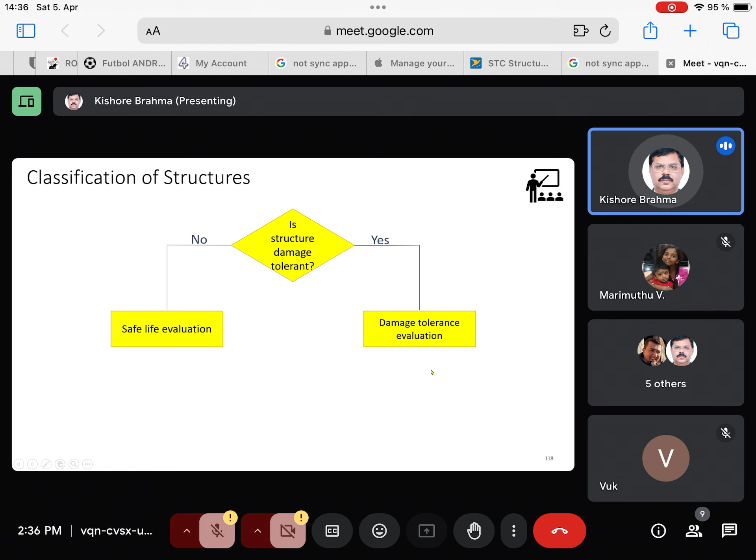So we'll recap quickly whatever I covered last Sunday. We'll see the classification first. It is basically done to identify, because there are so many components in aircraft structure, which structure has to be evaluated from fatigue and damage tolerance point of view. So here we have two categories: either it can be safe life evaluation or damage tolerance evaluation. On that basis, four main categories have been defined.

So this is a new slide I've added just to give examples of the most important components. And this is the flow chart describing how to identify category A, B, C, or D. Category A is defined as principal structural element. Both A and B are known as significant structural elements or items. So irrespective of classification, from the certification point of view, both category A and B have to be evaluated from fatigue and damage tolerance point of view.

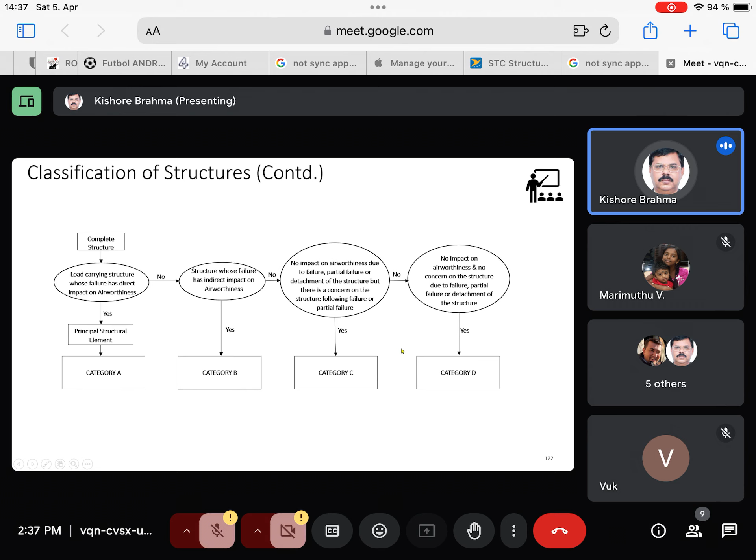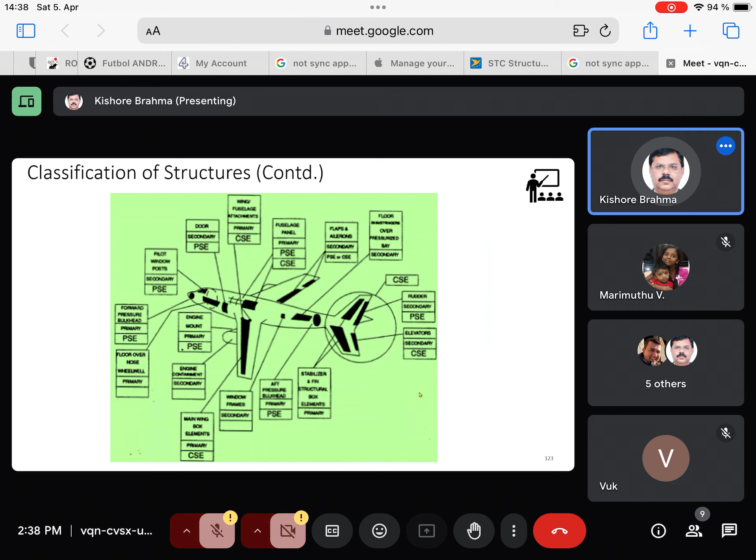This is the same thing reflected in a different format to make it simpler to remember. It's not too complicated, not so many flowcharts, but it follows the same thing as previously described. And this is a typical structure, released by FAA way back in the 90s in the public domain, where instead of category B, C, they have mentioned PSE and CSE. That's just for overview of the main components. They have not gone into detail of parts of each component.

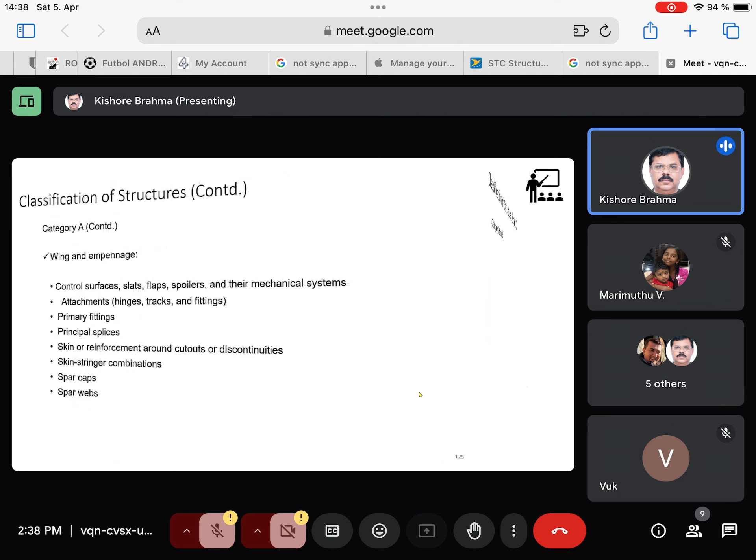So all these definitions, I've already shared the notes with you people, so I'll not go in detail now. This is also available and categorized by FAA. It is available in FAR also.

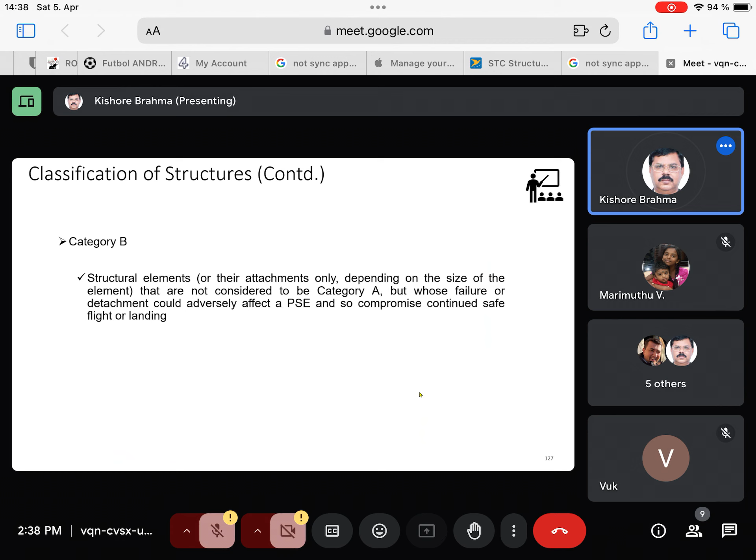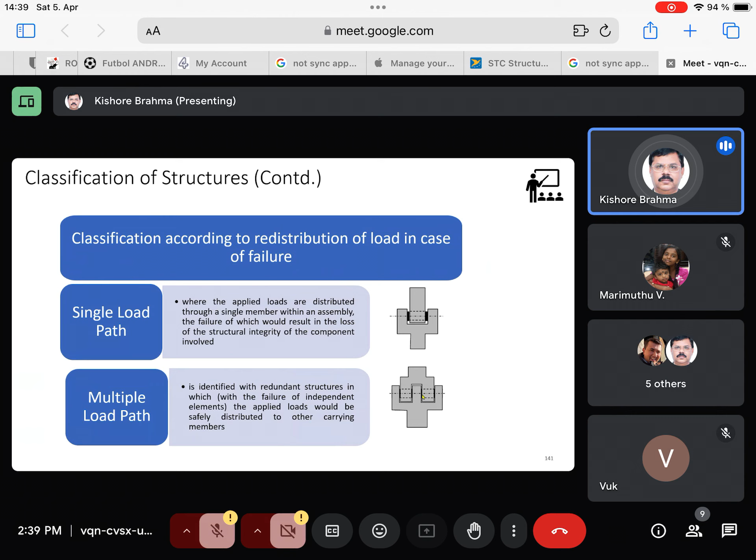So next, again, classification is done based on single load path or multiple load path, because ultimately whenever damage tolerance is introduced, the idea is how to include detectable crack length as well as threshold inspection and repeat inspection interval. With regard to single load path, it is straightforward. It can be detected when the crack grows from an initial flaw to a detectable crack length based on the type of non-destructive inspection. And critical crack length is based on the limit load.

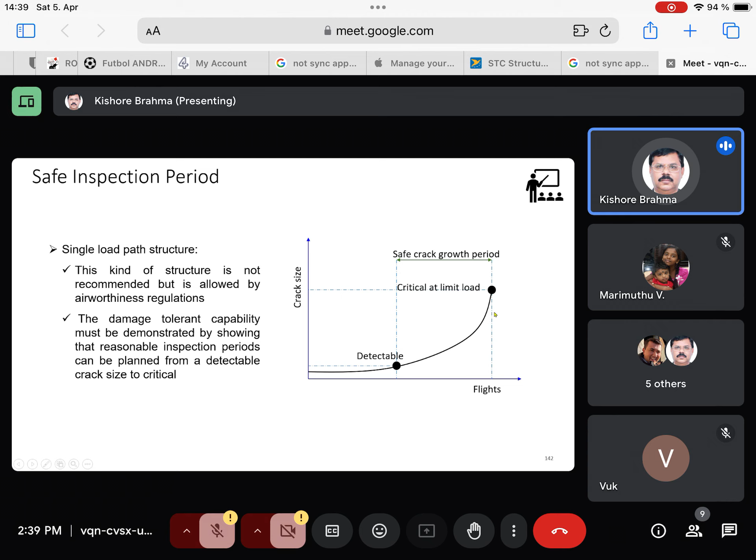Straightforward, we can find out the safe crack growth between those two.

But in the case of multiple load path structure, not externally inspectable, like a wing skin-stringer combination where the stringer is inside the wing, it's not possible to access the crack growth. The crack may start in the stringer flange and fail the stringer, but that doesn't lead to catastrophic failure of the wing. Crack may also grow in the wing, so the primary structure failed inside is not detectable. Only when the crack comes out of the skin do you have a limited safe crack growth period.

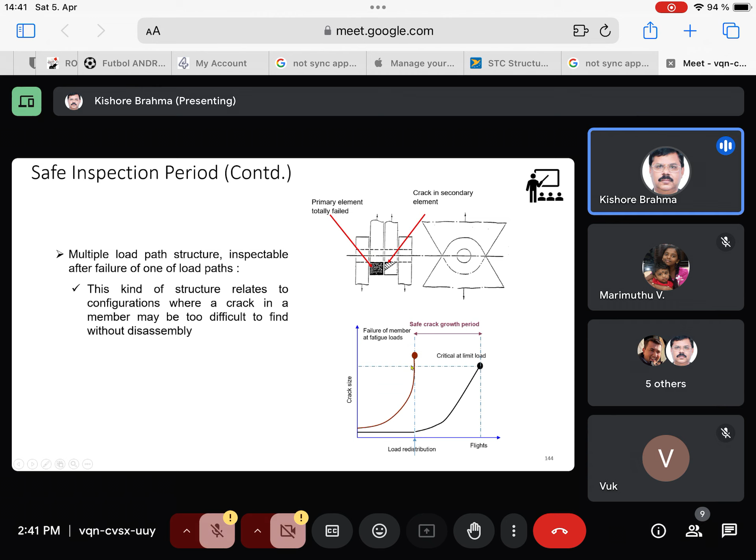Another scenario is multiple load path structure inspectable after failure of one load path, where you have a combination of spar and lug, two lugs instead of one. It's not easily accessible to inspect in situ, so the crack may grow and fail. But once one of the primary elements fails, it can be detected during the inspection interval. So that is the relationship between detectable crack length and primary load path, and next is secondary load path.

Now comes this, okay, this is the same thing.

Another scenario, same skin and stringer combination, but instead of an L angle stringer, it is an inverted T, giving better options for detecting cracks in the primary structure, the stringer front. Though recommended, it adds additional weight, inserting a T type instead of an L unnecessarily. But with this combination, we have a wider, better safe crack growth period available between the detectable crack length and critical crack length.

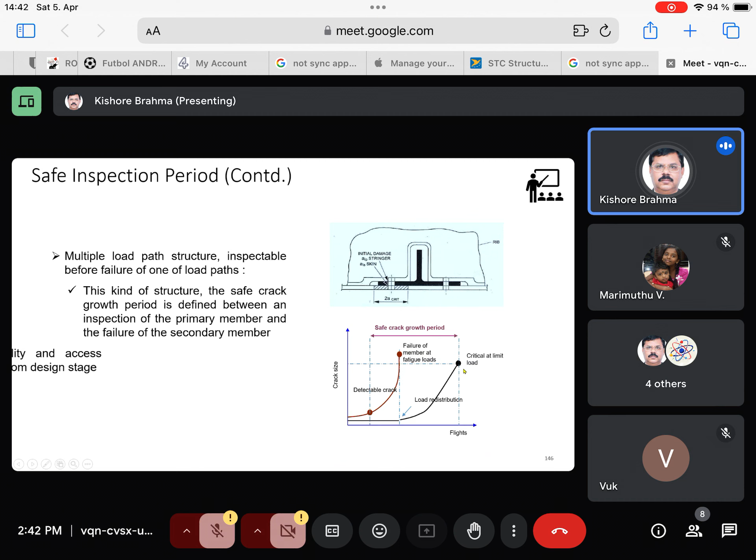So this is based on the inspection, the way we are able to inspect a single load path or multiple load path. This is more concise, the table which wasn't presented last time. When I share the entire presentation material, this will be there. It looks clumsy and compact, but it can be explained nicely.

So you have category A and B. It can be safe life. Category A and B, no doubt, per FAR requirements, have to be evaluated from fatigue and damage tolerance points of view. But FAA or EASA is liberal to allow category A or B or both to be evaluated as safe life, provided it can be demonstrated that inspection is not possible due to accessibility, economic considerations, or inability to implement damage tolerance design philosophy. So category A and B structures can still be done as safe life.

In that case, you go to fatigue life. So here is the path: in category A and B, you go to safe life. Obviously, in safe life, no inspection is allowed. So it becomes a question of fatigue life based on cumulative fatigue damage, like the S-N Miner's rule.

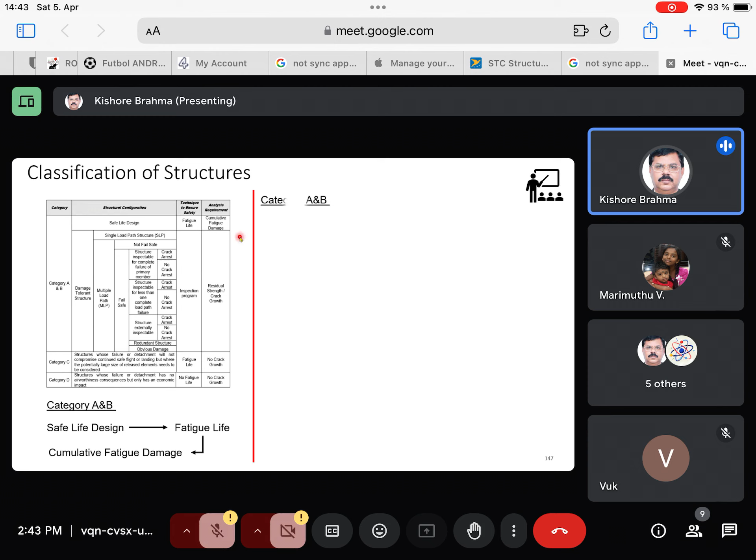But in the case of category A and B, next comes damage tolerance, which can be single load path or multiple load path. If you consider damage tolerance with single load path, inspection is required, based on residual strength and crack growth, which I'll describe down the line. We've already discussed residual strength and crack growth basics, which form the basis for category A and B damage tolerance with single load path.

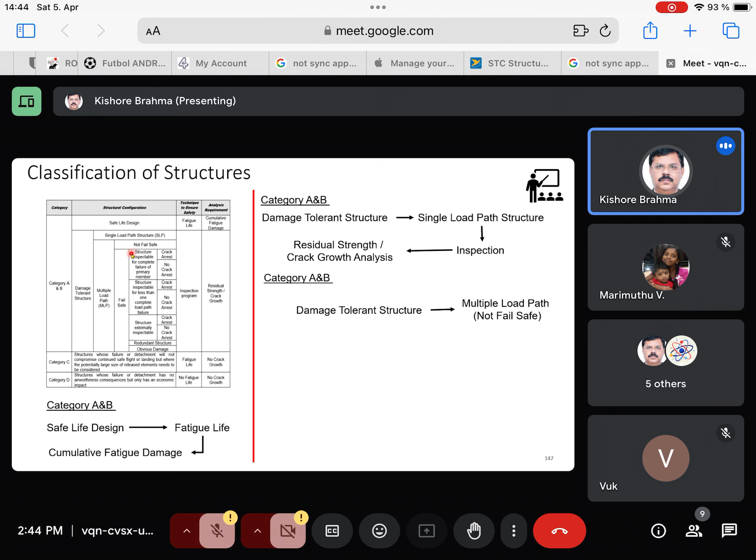In the case of category A and B which is multiple load path, it can be fail safe or may not be fail safe. Fail safe means you provide redundancy, a parallel load path, so if one load path breaks, other elements can carry the redistributed load. Sometimes this may not be possible, in which case it's not fail safe, and again it's based on inspection, analyzed through residual strength and crack growth analysis.

But in the case of damage tolerance category A and B, multiple load path and fail safe, we've seen previously four cases showing examples of structure inspectable: structure inspectable for complete failure of the primary member, structure inspectable for less than complete failure, and structure externally inspectable. Based on the type of component, one can follow these. I'm skipping the crack arrest/no crack arrest column, which is a rare case, special cases like stiffened panels, but most cases it may not be possible to achieve crack arrest.

So based on inspection, it is based on residual strength and crack growth, except for safe life, which is based on Miner's rule using S-N curves. But the rest is damage tolerance, meaning crack growth, and crack growth means you should have accessibility to inspection.

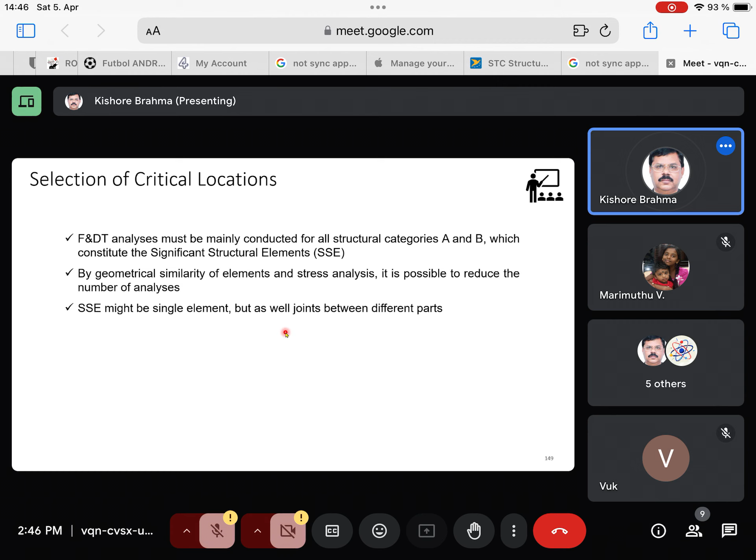Now coming to selection of critical locations, we have seen different items that can be identified as a potential source for identification. These are like review of joint areas, review elements. This is not exhaustive, but majority of them have been covered here.

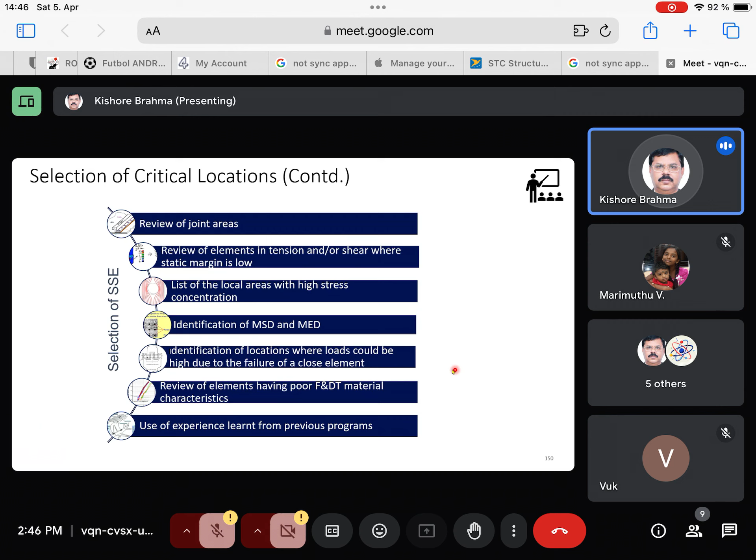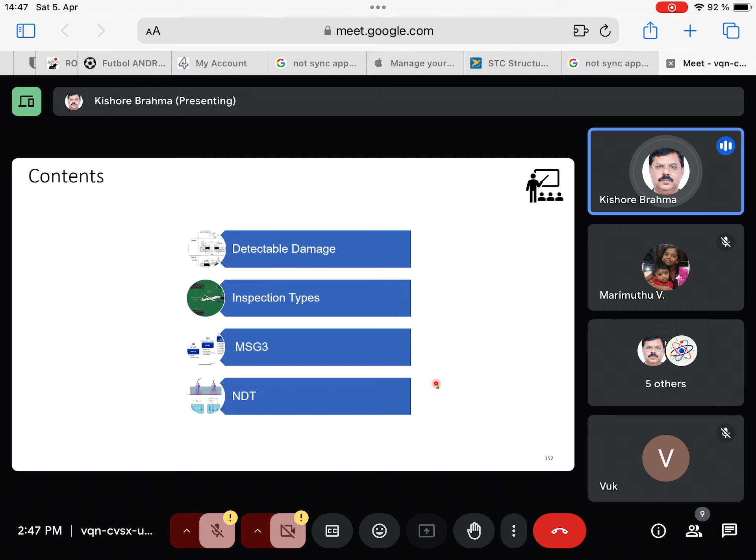Then next you have an overview of MSG3. As I mentioned, it's very narrative, so quickly there's nothing to explain. I will just quickly touch upon the important points. I have already covered detectable damage and inspection types, and partly I've done MSG3. Today I'll be covering non-destructive testing. That's the overview, so as mentioned earlier, it's only additional information to know how this MSG3, maintenance steering group 3,

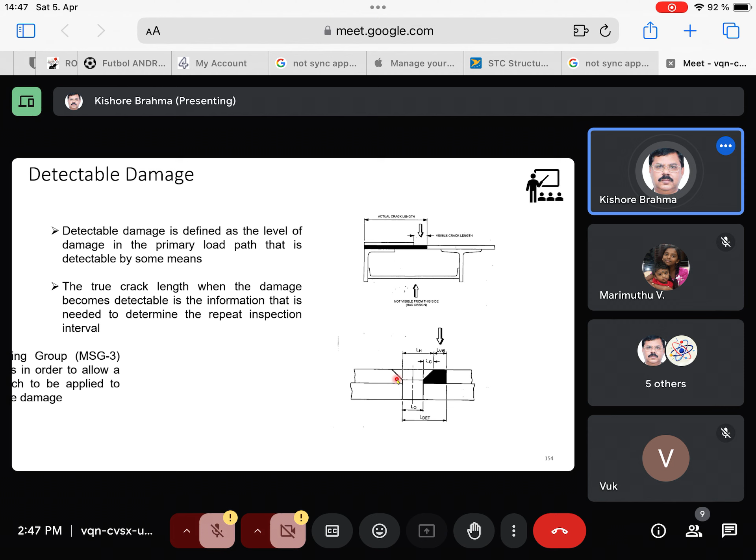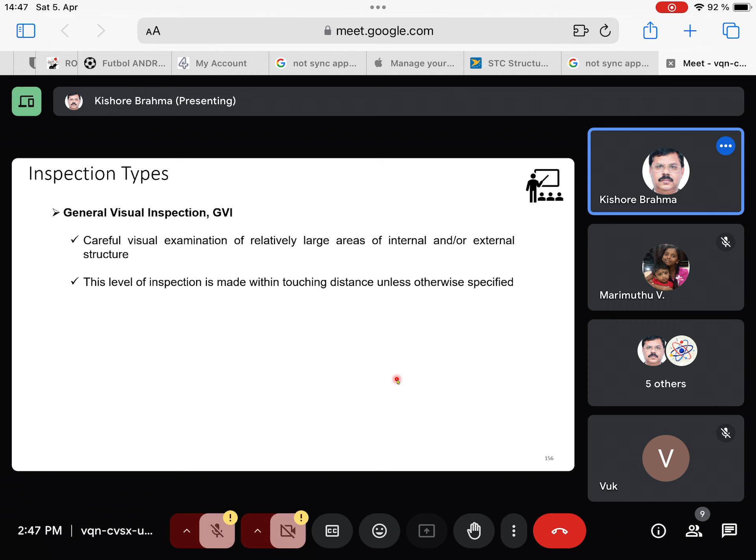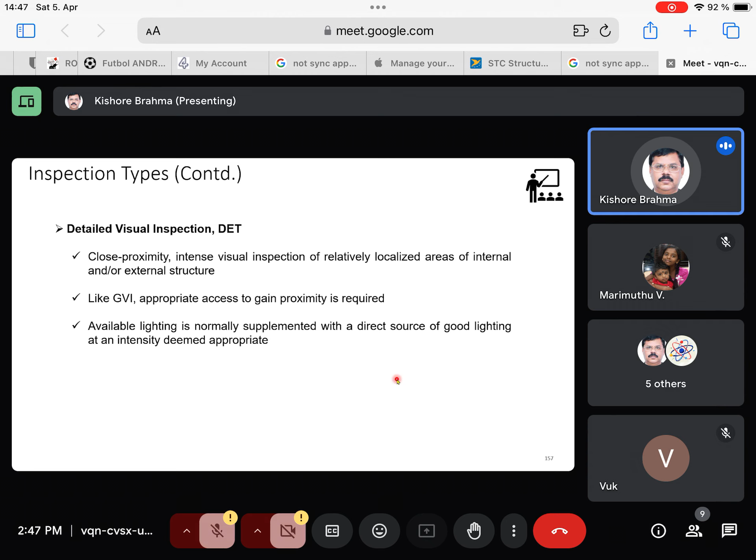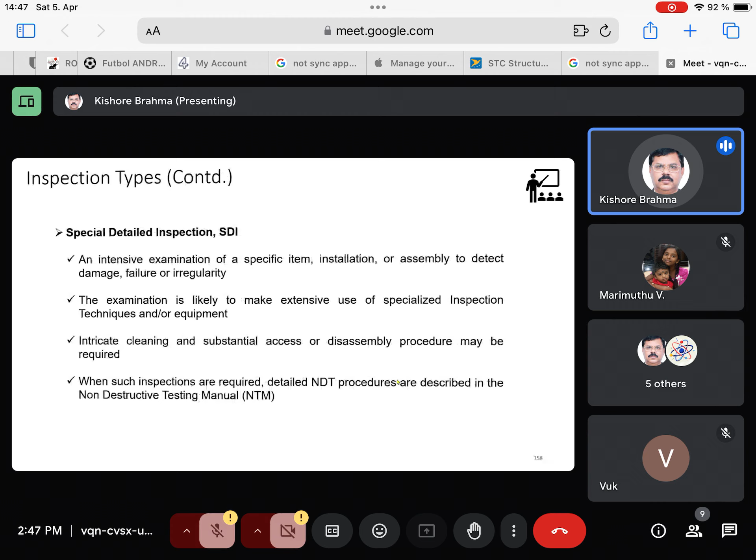is able to arrive at what should be the detectable crack length based on the general visual inspection or the detailed visual inspection. So these are the main inspection types, general visual inspection, and these are the salient points. Similarly for detail, those are all naked eye or using some special aid like lens, special light and all. MSG3 is only related to the detectable crack length, nothing to do with non-destructive inspection based on the equipment like eddy current, ultrasonic, magnetic particle, X-ray, and so forth.

So these are the basic six components, six inspection types that are being used in situ on the aircraft structure as a part of regular inspection.

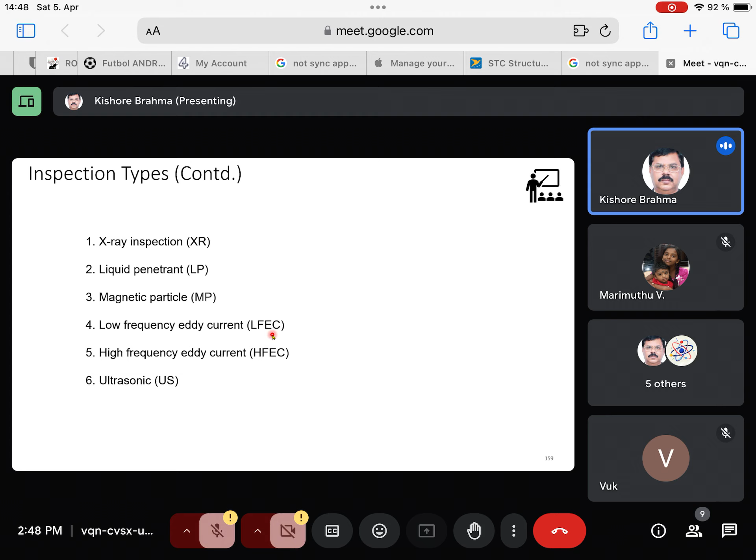Then we have seen the overview of MSG3. Prior to that, I just defined what is a principal structural element, what is the airworthiness limited items, and significant structural items. MSG3 is responsible to arrive at inspection schedule and also the detectable damage that may occur due to accidental damage, environmental damage, or fatigue damage.

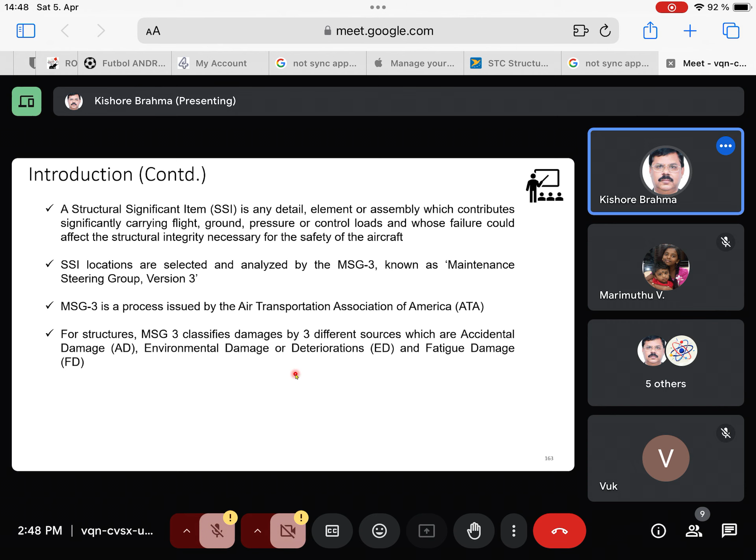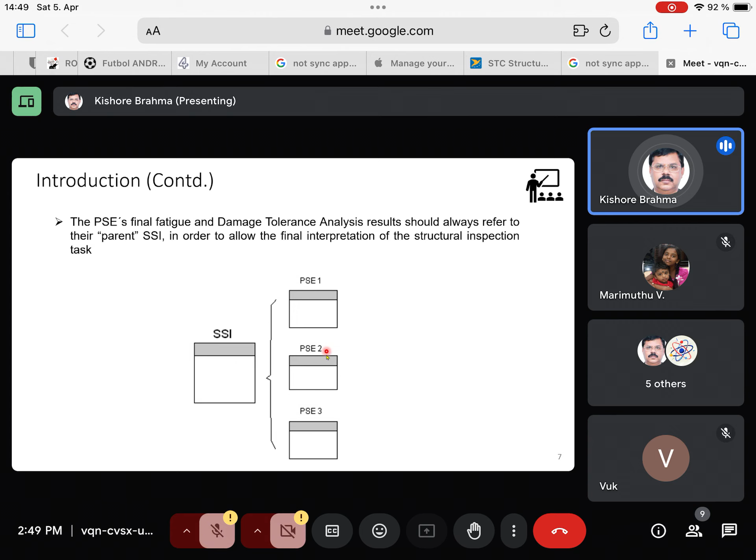And since there are so many forms of principal structural element, for easy accessibility and identification, they also give SSI, structural significant item, category A and B. Under each serial number, they will be having PSE 1, 2, 3 based on the same inspection area and all. This is background already described earlier.

As of now, MSG3 is the latest one from 1981, 80 onwards, but obviously there are multiple revisions. This is not accessible publicly; it's meant only for airlines and all. But the basics have been covered, how MSG started with 1, 2, and 3. The main objective is to increase efficiency, because every time you ground the aircraft for maintenance it involves financial consideration. So obviously they have to improve the efficiency without compromising safety.

Detectable crack length is already defined, and this is based on visual and hidden. Your detectable crack length is a summation of visual and hidden, and also visual again is based on the basic detectable crack length multiplied by gauge factor, and this is all process involved. There is no say over by anybody else. MSG3 has done the systematic study, and that is applicable to and acceptable to not only the airworthiness agency authorities, but also airlines, customers, and certifying agencies.

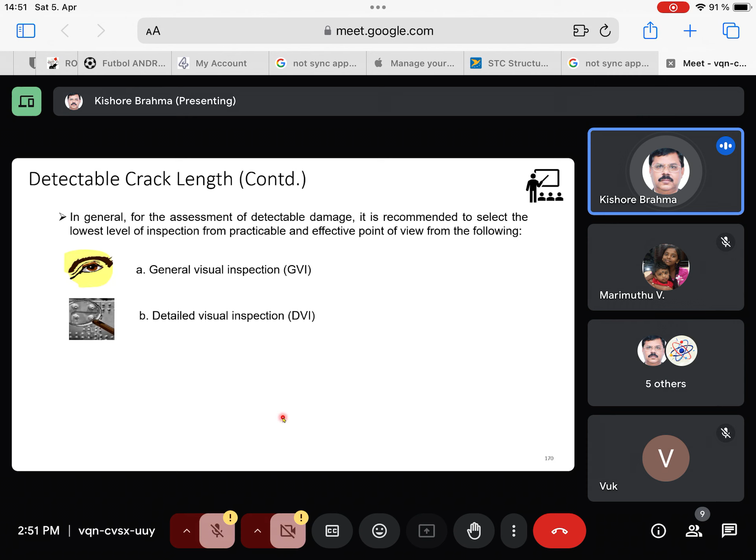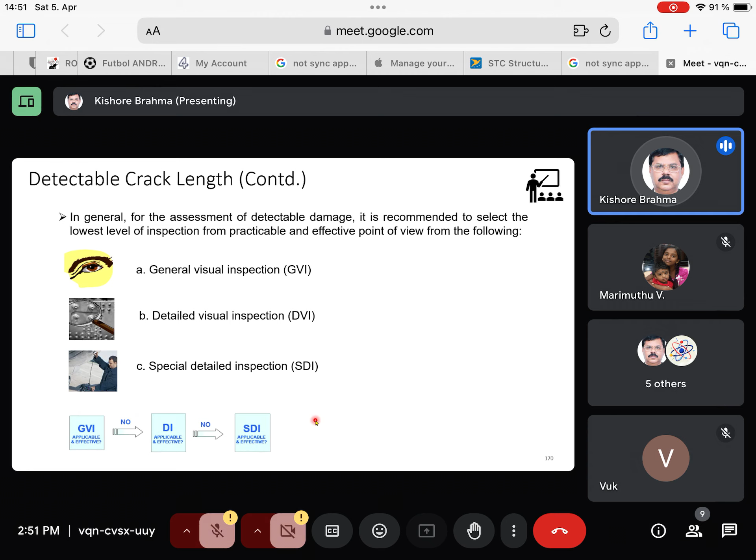This detectable crack length can be used not only for threshold inspection, the first time inspection of that component, but also for repeat inspection interval. So you have general visual inspection, detailed visual inspection, special detail inspection which uses special equipment. Both A and B are naked eye to be used. The idea is they will try to formulate detectable crack length based on general visual. If not possible, then they go to next level of detailed visual inspection. If not possible, then they go to special detail inspection.

Not possible, then go to DVI. If not possible, go to NDI, NDT equipment—there are a set of NDT equipment. Again, they'll try to see whether it will still be possible to detect the crack, meeting the practicability. One can detect if the detectable crack length is too long and is close to the critical crack length; then we will not be able to schedule any inspection interval.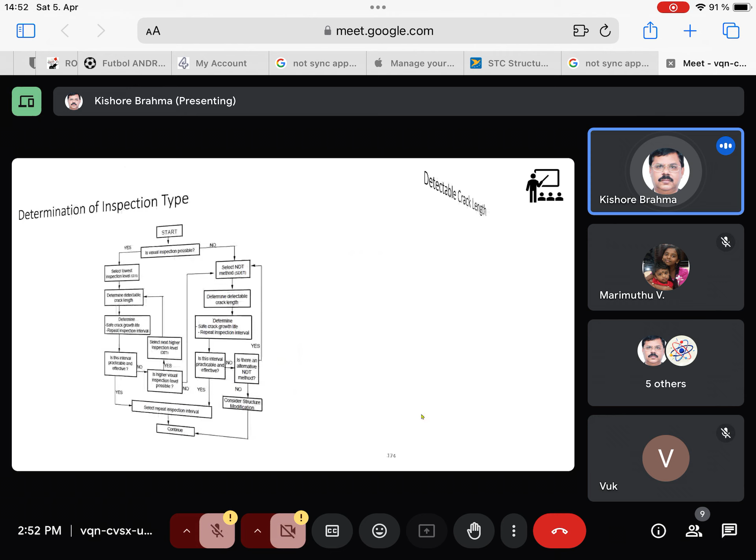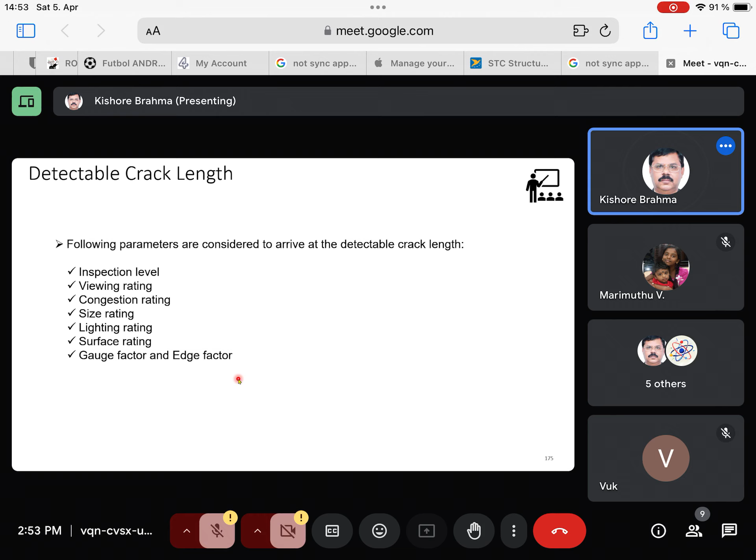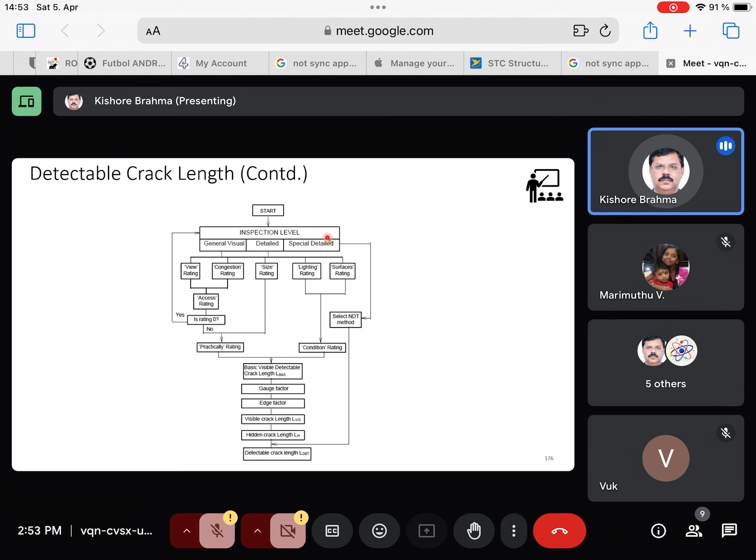This is the flow chart showing how the ratings are based on this. Ratings means some numbering is assigned based on these particular ratings. So this is to decide - if GVI is not possible, then go to detailed design. But as mentioned, MSG-3 is nothing to do with special detail.

It's just separate because that involves the equipment, probability of detection of the equipment. So these are the review questions related to what I covered last Sunday, and see whether the questions are simple and understandable.

Is that clear? So let's start the next slide. Yes. Okay, sir. Okay.

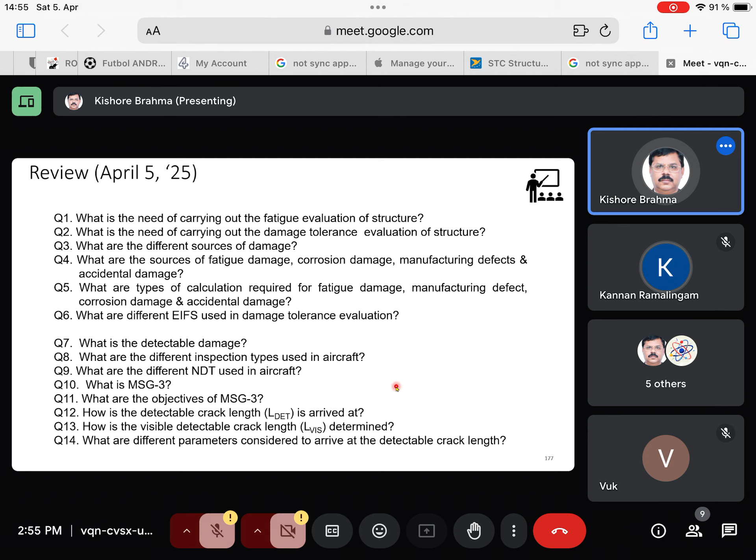So now we'll go through these again - they are very narrative. Anyway, you will have the notes with you, but I'll just explain. It's very self-understandable, there's nothing much to explain there.

So viewing rate means it's related to accessibility of that particular component. Please remember, it is only related to general visual inspection and detailed visual inspection, where you don't use any special sensor or equipment.

So the ratings are based on the type of accessibility - whether there's no access, obviously the rating will be 0. Hidden items at distance greater than 3 meters, poor or moderate and good. So this is the definitions of viewing condition.

For each they are given the numbering that I will show you in the flow chart, in the process how MSG-3 uses the process to give the rating. So this is related to viewing rating.

So when general visual inspection is considered, the viewing rating should be selected according to the zonal inspection condition. For the classification or identification of zones of the aircraft, because the aircraft is such a huge structure, they have to identify some zones that I will tell you about down the line.

For detailed inspection, a viewing rating of 3 is selected. So for GVI, there is a different rating. If it is only meant for detail, obviously it is only 3. Because for detail, your distance should be within 0.5 to 1.5 - something like that, as we saw in the salient feature. Anything more than that is not applicable for detailed visual inspection.

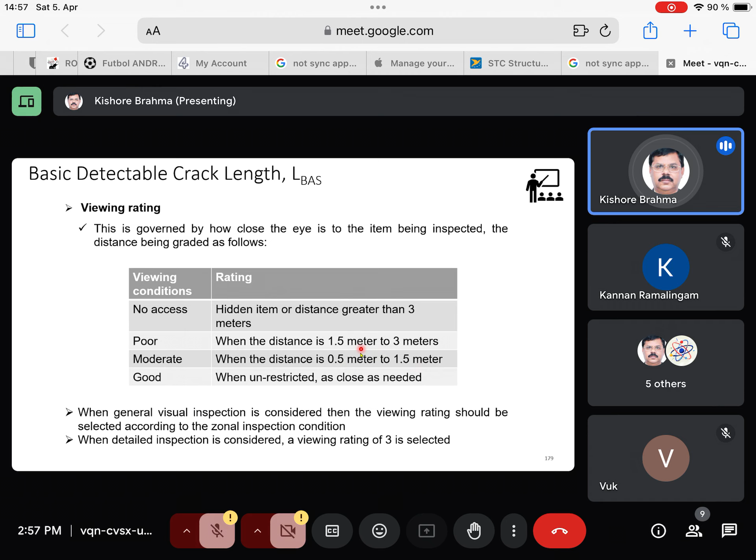Then comes the congested rating. It is divided into 3 conditions depending on the number of components and systems in the area to be inspected, and the complexity of the equipment. So it can be congested, it can be moderate, or it can be a clear area.

A clear area example is external skin area, or a congested example is obscured by pipeline. So there are 2 extremes, and in between is moderate. Whatever inspection level is considered - general, visual, or detailed - the congestion rating should be selected in accordance with the SSI area.

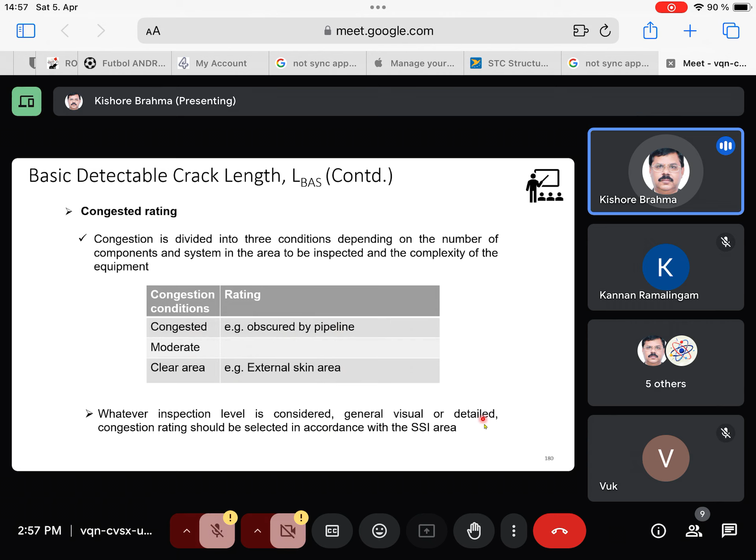Significant structural items - okay, that has already been classified based on the PSE. So based on that SSI, the rating has to be assigned.

Next comes size rating. So your general visual inspection requires an assessment based on the size of the zone as per the zonal program, whereas for detailed visual inspection, the size of the SSI concerned has to be taken into account. All SSI - you have seen the PSE forms a subset of SSI.

So it can have 1 to n number of PSE, but the SSI will have a limited number of PSE and all.

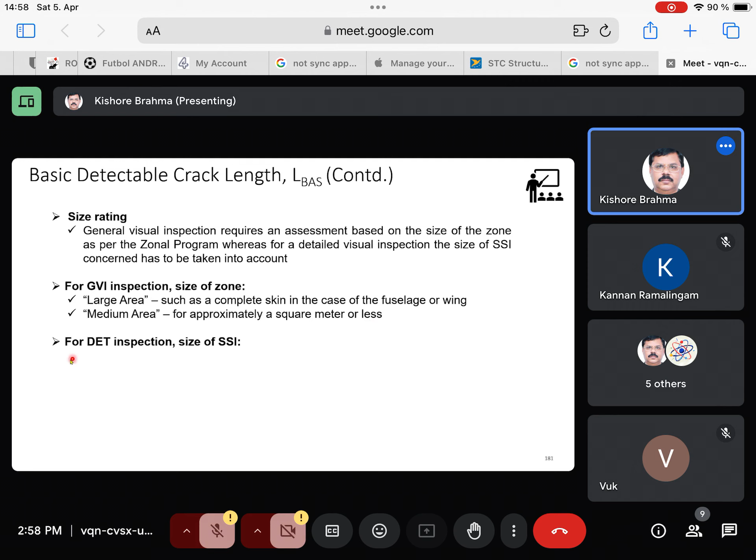For GVI inspection, the size of zone is given as a large area, such as a complete skin in the case of fuselage or wing, or it's called medium area for approximately a square meter or less. But for detailed inspection, the size of SSI, there is no question of area.

It is related to fitting, whether it's a frame or spar. Medium size fittings include portions of frames, spars, ribs, and intercostals or stringers. I hope you are aware of these intercostals.

Marimuthu, are you aware of it? Yes, sir, but intercostal - I think I could not visualize the component, how it looks. Do you have any images, sir, where it will come?

Right now I don't have, but I can explain you. See, you have frames interspaced, right? Yeah. Okay, but once you make a door which may cut across 1 or 2 frames, or at least 1 frame - yeah, no continuity - then the surrounding we need to put frames. It's like a hatch. So if this is the door, cargo door, passenger door, whatever may be.

So this should have been frame. I'm just giving dotted line because it's behind the skin, and obviously one of the supports will be the frame, and on the other side also you should have a frame. But the middle frame doesn't have any continuity, so they provide intercostal here.

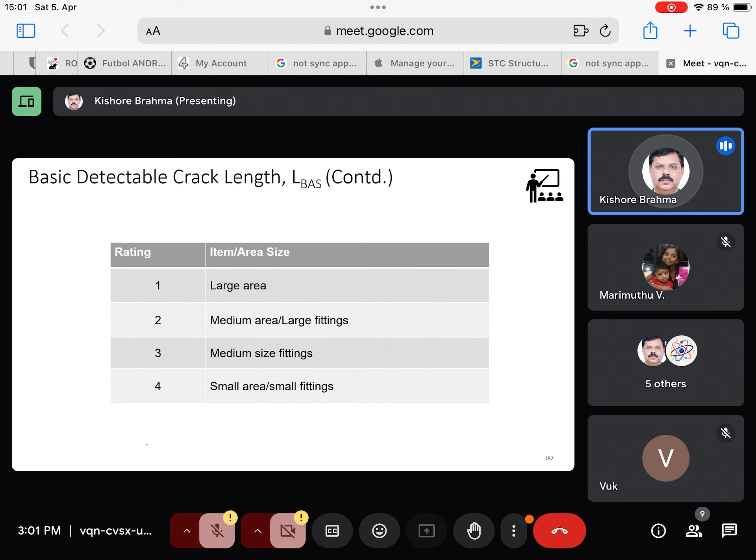So when it comes to detail, the definition is related to fitting, depending on the zonal size, which I'll be showing down the line. So here, large area rating is given as 1, large fitting is 2, medium size fitting is 3, and small area or small fitting is 4.

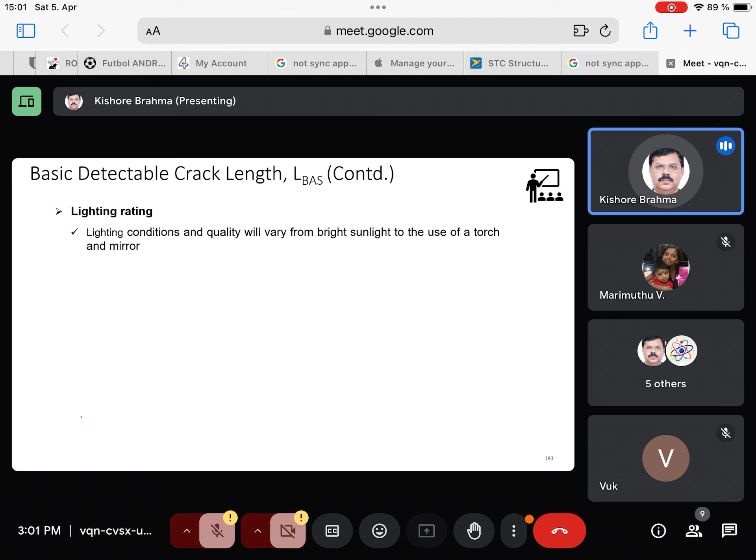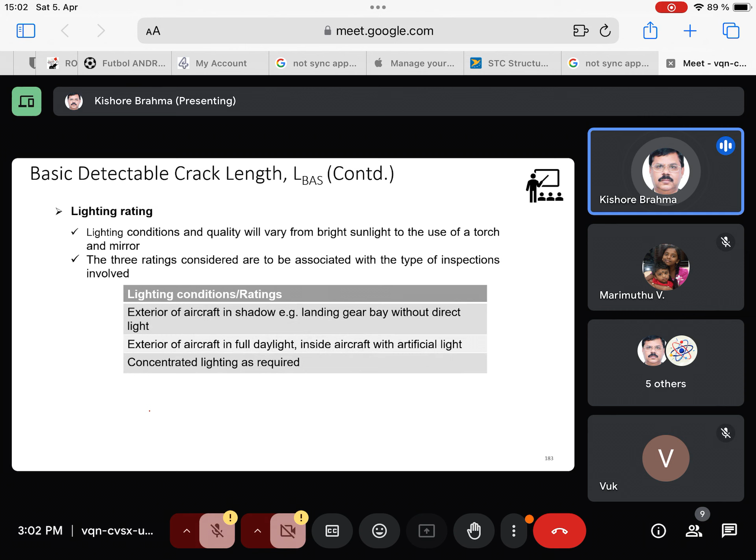Then lighting rating, again, it's based on the surrounding lighting. Sometimes you have to use special lighting like torch and mirror. The 3 ratings are considered to be associated with the type of inspection involved. Exterior of aircraft in shadow, for example landing gear bay without direct light. Then exterior of aircraft in full daylight, inside aircraft with artificial light, and concentrated lighting as required, depending on the location.

The first 2 ratings or conditions should be used for general visual inspection. Normal cabin light can be used as necessary. Then obviously concentrated lighting is to be used for detailed visual inspection. That is one of the salient features of DVI, where you have to use concentrated light.

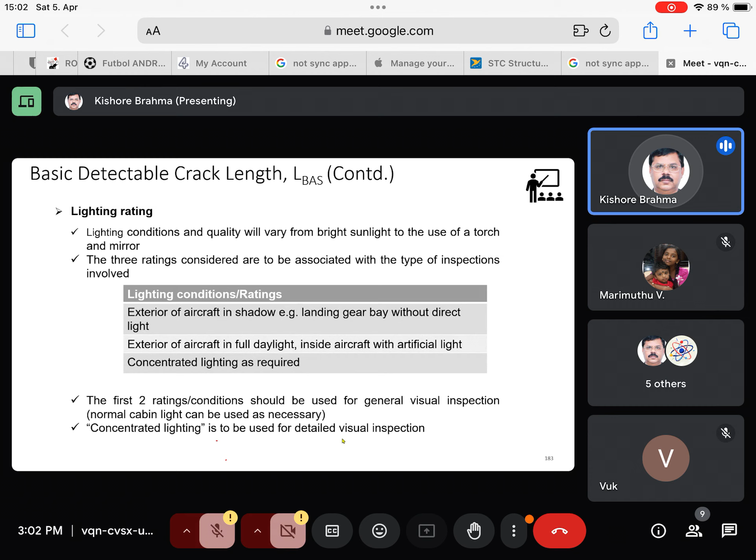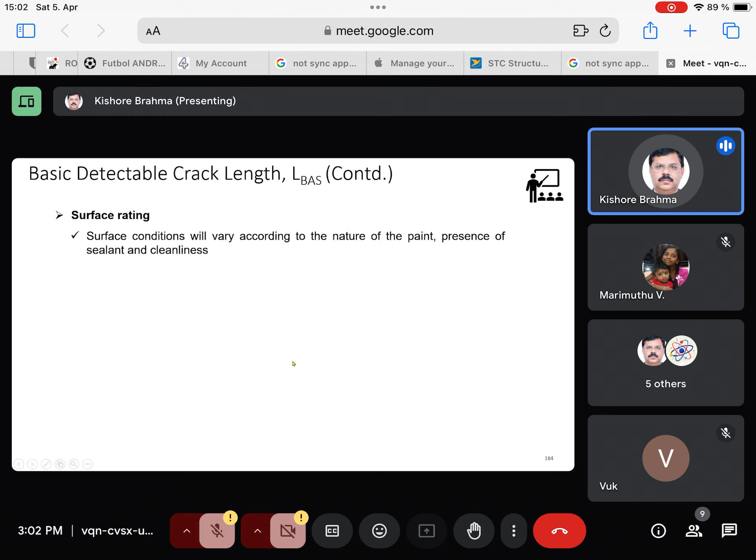Then you have a surface rating. Surface condition will vary according to the nature of the paint, presence of sealant or cleanliness. 2 ratings are considered as follows. One is areas or items liable to be covered in sealant or subjected to excessive grease, oil or dirt contamination. And another is clean area with the removal of sealant. Detailed inspection requires a clean area with the removal of sealant. Sealant or grease needs to be removed in preparation of the surface before inspection.

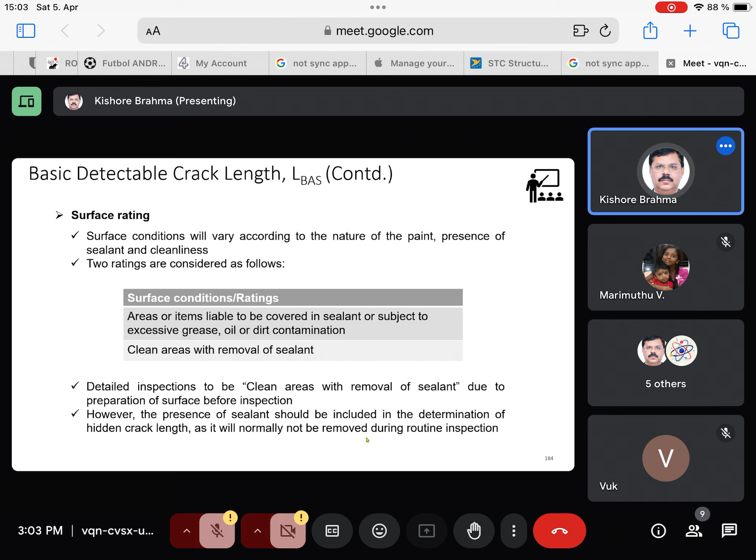However, the presence of sealant should be included in the determination of hidden crack length, as it will normally not be removed during routine inspection. There are cases where it's not recommended to remove the sealant. In that case, a crack under the sealant will be considered a hidden crack. Now we have seen all the ratings required for the determination of basic length.

Now we will go into how to calculate the detectable crack length, which is known as visual crack length, the crack length which can be observed using the naked eye. You have a basic length based on the type of rating, gauge factor, and an edge factor. MSG-3 has already come out with the process flow and rating and what should be the crack length. So it's nothing to do with the OEM or user or any engineer to evolve or develop a detectable crack length.

This is already inbuilt. Unless one uses NDT equipment, about which MSG has no say, and depending on the type of equipment used, ultrasonic or low frequency eddy current or high frequency eddy current, they will have a probability of detection depending on the resolution of that equipment. That will be listed along with the equipment, so one has to go by what the manufacturer of the NDT equipment provided. But in the case of GVI and DVI, everyone, the authority, OEM, and user, has to follow this rating.

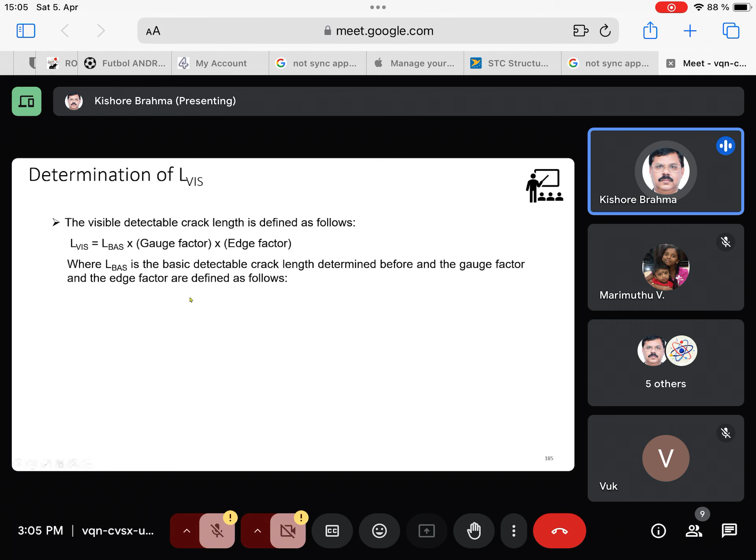So gauge factor basically depends on adjustment for material thickness. The component will have different thicknesses. For material thickness less than 5 mm, gauge factor is generally considered as 1. For material thickness 5 mm to 10 mm, gauge factor is 1.25. Anything more than 10 mm, gauge factor is considered as 1.5. There's no way it can be questioned why 1.5, why not 1.2. This has been evolved, so you have to accept it as it is.

Edge factor, this is related to adjustment for the edge. The occurrence of crack, whether it is accidental damage, environmental corrosion damage, or fatigue damage, depending on the thickness and edge factor, whether it is in the center or edge, will decide how prominently the crack length can be detected. That's why they have added gauge factor and edge factor. For cracks which originate from or terminate at the edge of the component, an edge factor of 0.5 should be used. For non-edge cracks, an edge factor of 1 is used.

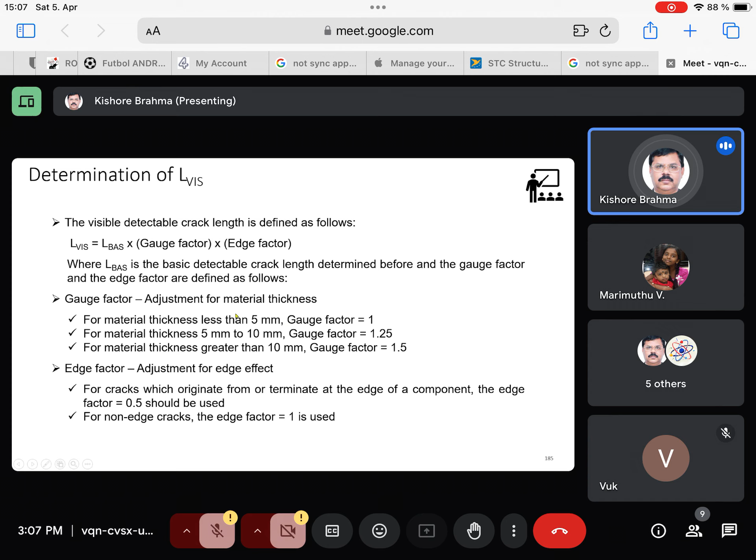Now we have seen the L basic. The detectable crack length, if you say it's 1.25 into 1, means that the crack length could be 1.2. No, the rating that I'll show you. I'll give you an example. Depending on the viewing, surface condition, lighting, and all, the ratings are there. So based on the rating, that has to be multiplied. I'll show you one example. Okay, sir. Then it will get clear.

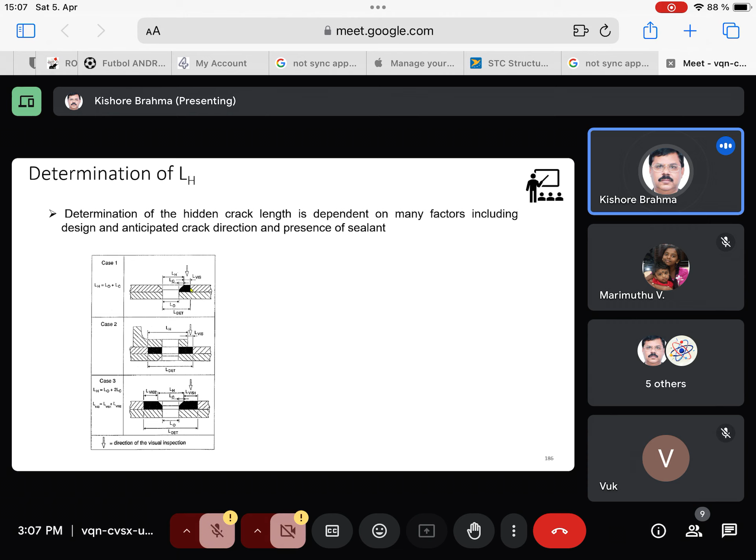So we have seen L basic, then L visual, then next comes hidden. There are 3 components to determine the detectable crack length. So determination of the hidden crack length is dependent on many factors, including design, anticipated crack direction, and presence of sealant. So these are 3 special major cases where you can have a 2-plate joint using countersunk rivet. So obviously you have a hidden length of the total diameter and hidden countersunk LC. So these are the definitions.

L0 is the effective length due to the fastener hole. L0 here. So this is the diameter. LC is the length of countersunk, because throughout your fuselage and wing, they may use the same countersunk, but their geometry and diameter may vary. So depending on that, and also the crack may occur at one end or at both ends. So there's a possibility of this. In that case, LH is the hidden crack length, L detectable is the effective detectable crack length, then the visual detectable crack length, then the basic detectable crack length.

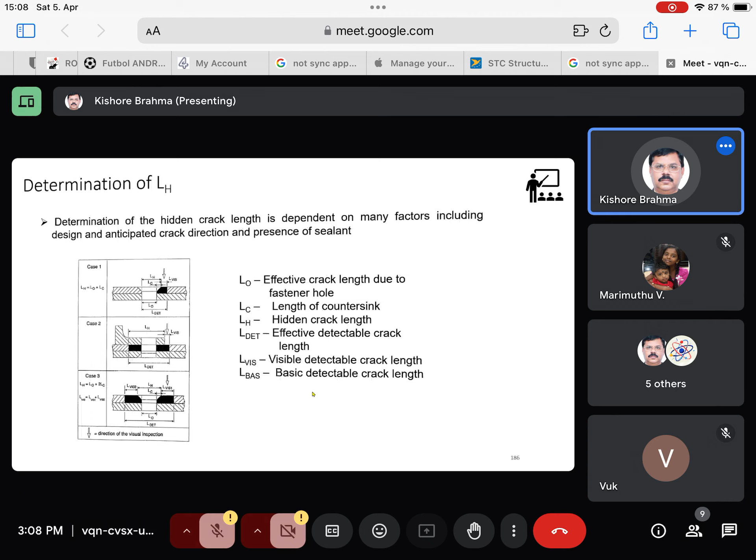So in this case, the 3 most important cases, your direction of visual is from the top, this arrow what you see. So when cracks come out from the countersunk, obviously as long as it crosses LC, it is detectable, but it depends on the ability of the technician to see clearly without any ambiguity, without any doubt. So it will be some cutoff, and this length is far away from LC, depending on the rating.

This is another case. There is no countersunk, but you have a 3-plate joint. The crack may start inside, and obviously it's blocked by the top plate as well as the bottom plate. The bottom may not be accessible. You have to see from the top, because the bottom you cannot see with the naked eye. So obviously, in that case, you don't have any other option other than using special NDT equipment, either ultrasonic or eddy current. But as long as visual is considered for this type of component, you have to have this. And of course, in countersunk, you can have a crack on both sides, where hidden is L0, the diameter, plus 2LC.

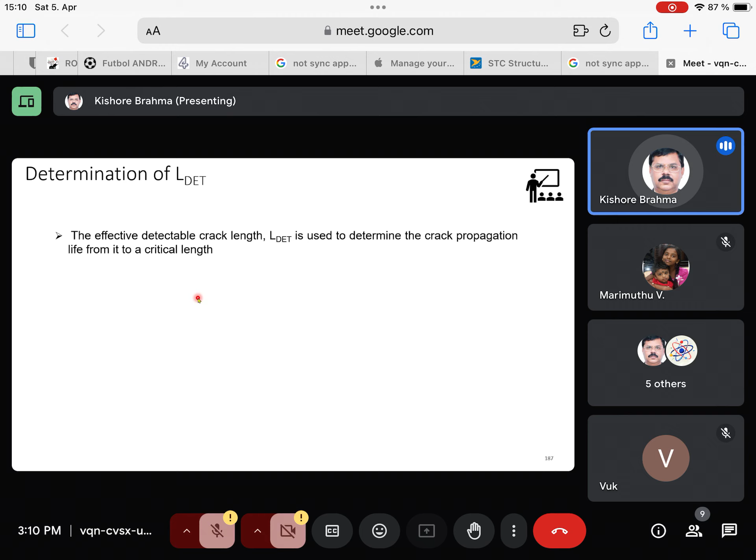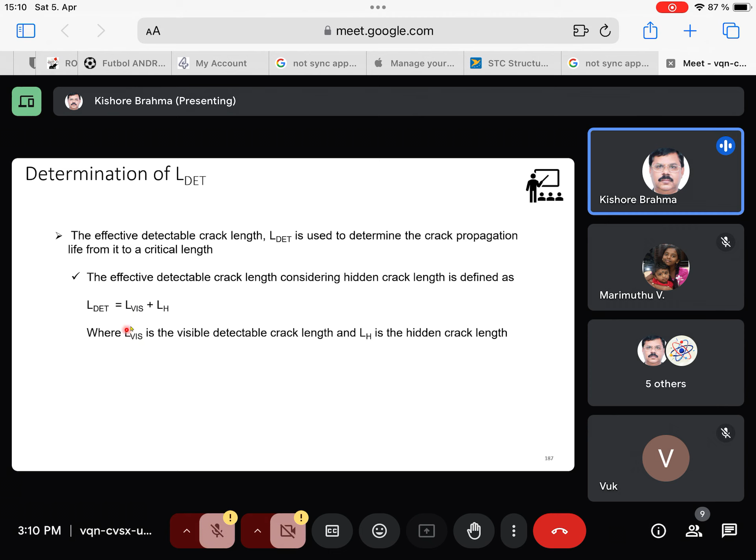So effective detectable crack length is used to determine the crack propagation life from it to a critical length. The effective detectable crack length considering hidden crack length is defined as L visual plus L hidden. So L visual is the detectable crack length and LH is the hidden crack length, which are the definitions. And that's all related to the visual detectable crack length based on the naked eye, GVI or DVI, detailed visual inspection. But when it comes to special detailed inspection, this is based on your NDT equipment.

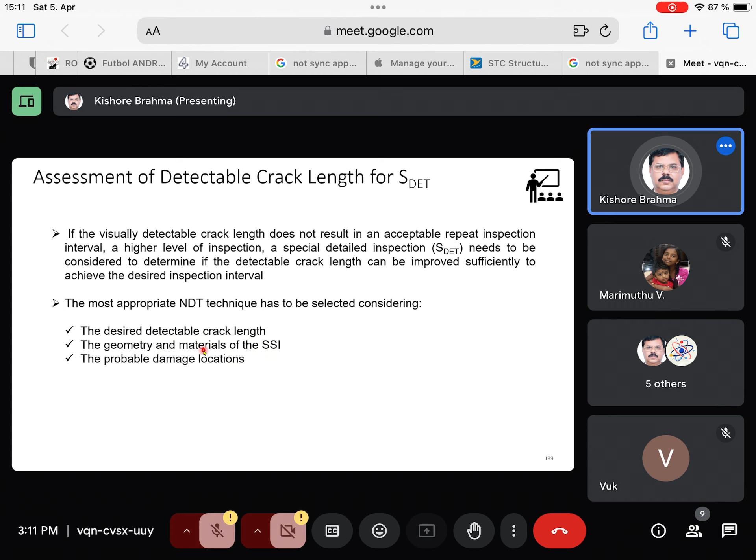And the basis for using NDT is the detectable crack length, the geometry and materials of the SSI, and the probable damage locations. So based on these criteria, one can go for inspection using NDT equipment. So this is the type, zonal and directed inspection program. Two inspection programs are used to ensure the integrity of the structure. One is called the zonal program, which is general surveillance. That is adopted as soon as the aircraft lands after completing one sortie and before it takes off to another destination. And the structural program, which is directed inspection, where you have to use NDT equipment.

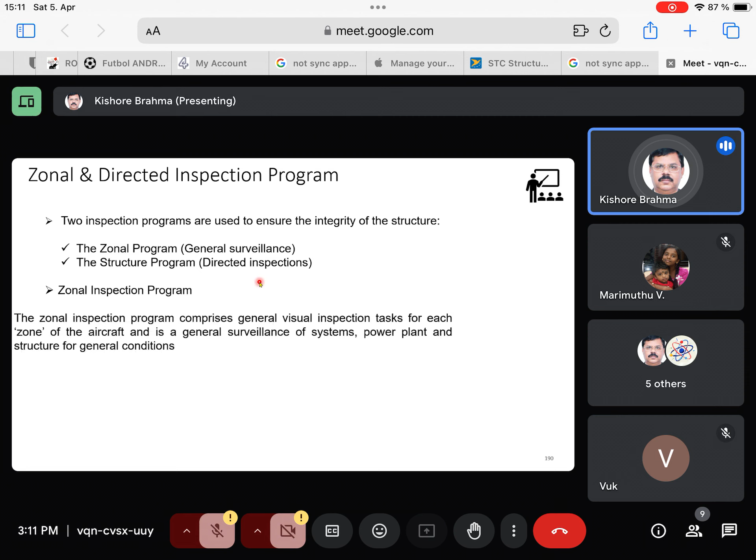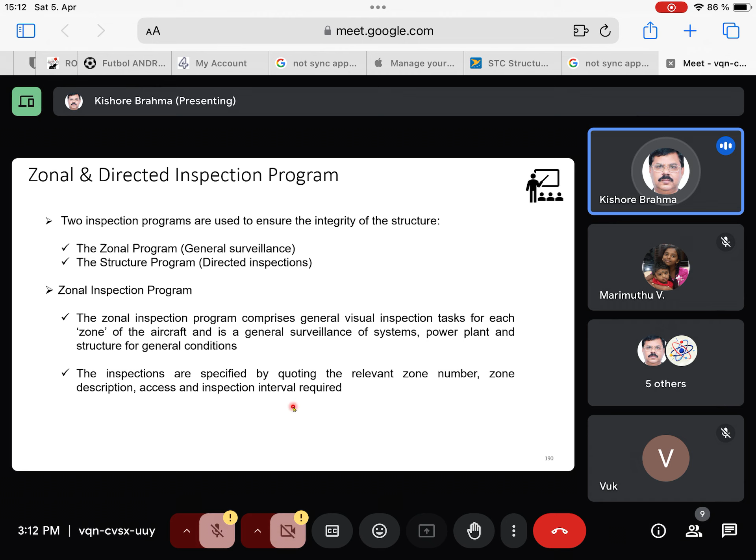So the zonal inspection program comprises general visual inspection tasks for each zone of the aircraft in the general surveillance of systems, power plant, and structure for general conditions. And the inspections are specified quoting the relevant zone number, zone description, access, and inspection interval required. So obviously, the way ATA chapters have been used to identify each section without any doubt. Fuselage is 53, wing is 57, door is 52, like that. Similarly, each component's location will be different, for easy accessibility and understanding. So the zones of the aircraft have already been universally defined.

Okay, shall I go to the next?

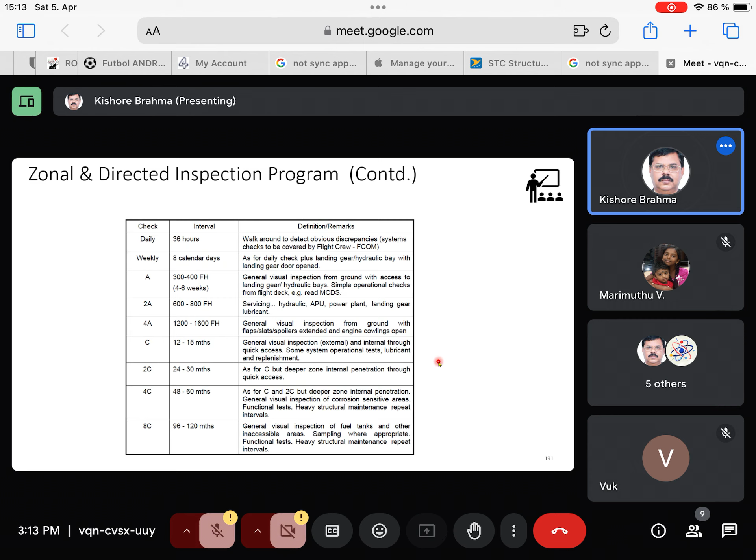Shall I move to the next slide? Yes.

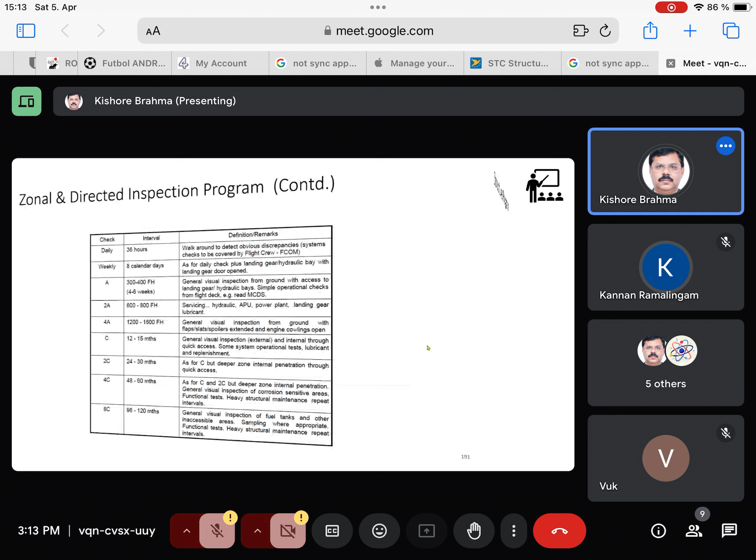So this is a structured program where, based on your crack growth analysis, for each component one would have arrived at what is the threshold inspection. That's the first detected crack length, at what number of flight hours, and what is the repeat inspection interval. Those are based on the crack growth analysis for each component. Obviously, each component will have different detectable crack length, different inspection interval, and all. Finally, they arrive at the exact threshold and inspection interval based on the minimum of the analysis done for each component.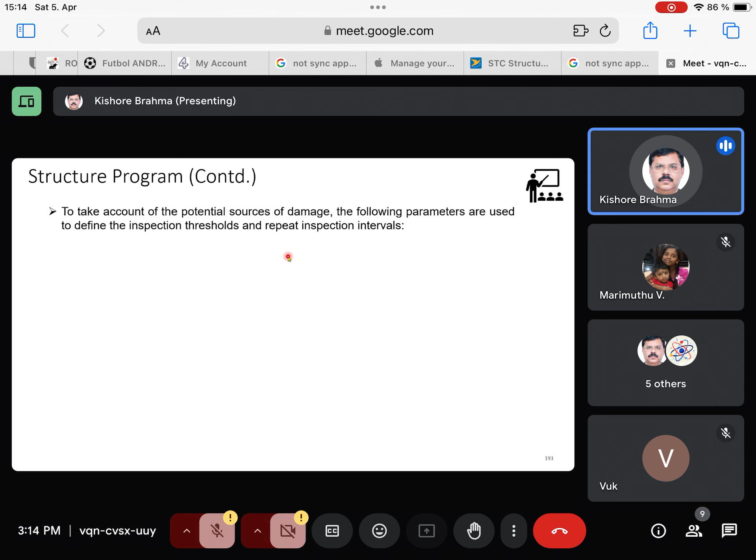So this is what is called the directed inspection program. There they use detailed inspection, which corresponds to detailed visual inspection, and also special detailed inspection using special techniques wherever necessary. To take account of the potential source of damage, the following parameters are used to determine the inspection threshold and repeat inspection interval. Usually, whoever is involved in the Airbus work package, they would have given the type of damage.

If it is fatigue damage, items affected by GAG cycle which are not range dependent. This is the ground-air-ground cycle, but irrespective of range, short range or long range, some damage may occur. And another is fatigue damaged items affected by GAG cycle which are range dependent. So the same aircraft is being used for short distance, and another for long non-stop distance. Usually they will specify the inspection, whether it's a GVI or DVI or NDT, in terms of flight cycle. In the case of range dependent, it will have both flight cycles as well as flight hours.

And obviously, environmental deterioration is nothing but calendar. It's based on the year, so it will be the number of years after which one has to inspect it. Accidental damage is whenever an accident occurs, like a lightning strike, or a dent due to a hailstorm, or when the aircraft is on the ground, some ground vehicle might have hit somewhere. In that case, it has to be attended there and then. Only note down at what flight cycle or flight hour it happened. But usually other types of fatigue damage can be expressed in terms of flight cycle or flight hour.

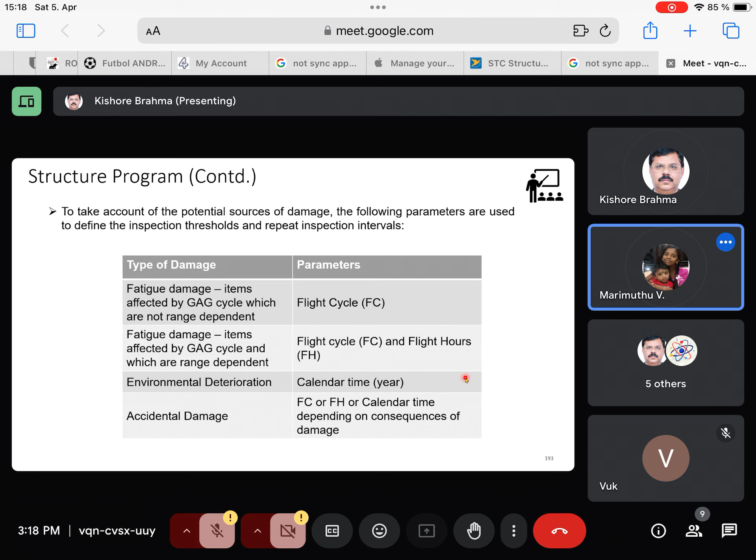So this is a process sheet. Again, it's not openly available. You can see that you have a viewing rating, then a congestion rating. Put together, it is known as access rating. Along with access rating and size rating, you have a practicality rating. And again, it depends on the lighting rating. So you have seen those five parameters.

Then surface rating. Please remember, the congestion rating is different and the surface rating is different. The surface rating can be either dirty or clean, depending on the grease, sealant, and all. And it can be on the exterior of the aircraft or in shadow, because again, lighting depends. These ratings are already decided and assigned by MSG-3. It's a steering committee with many members, so based on their systematic study, they have given the rating.

So based on that, finally you come up with some rating. This rating is nothing but crack length. Once I show the example, the clarity will be there. But this is the process sheet they use to arrive at the detectable crack length, which has been decided by MSG-3 and accepted by airlines, OEMs, and all.

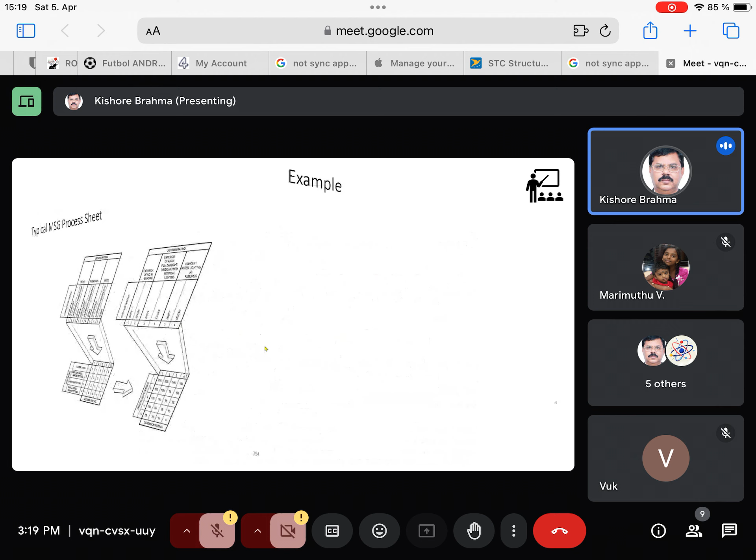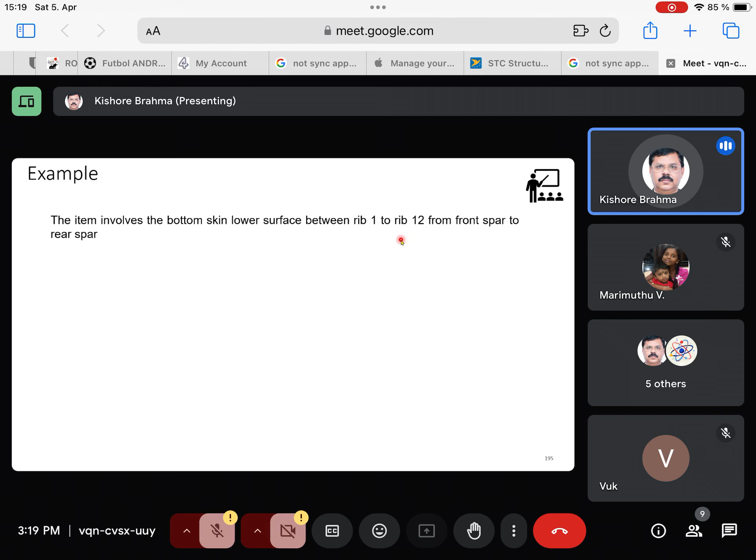So here, for example, the item involves the bottom skin lower surface between rib 1 to rib 12. You can imagine, on the bottom surface there will be so many ribs between the front spar and the rear spar. And obviously they will have a countersunk head, which you have already defined. L vis is L visual.

So it's not likely that a crack may grow in both directions simultaneously. If at all it grows simultaneously, the length may be different. That's why two different visuals have been given: the left-hand side may have a different crack length and the right-hand side will have a different crack length. And L hidden is nothing but the diameter of the countersunk head, and L0 is the diameter of the shank. So this is the thickness of the plate.

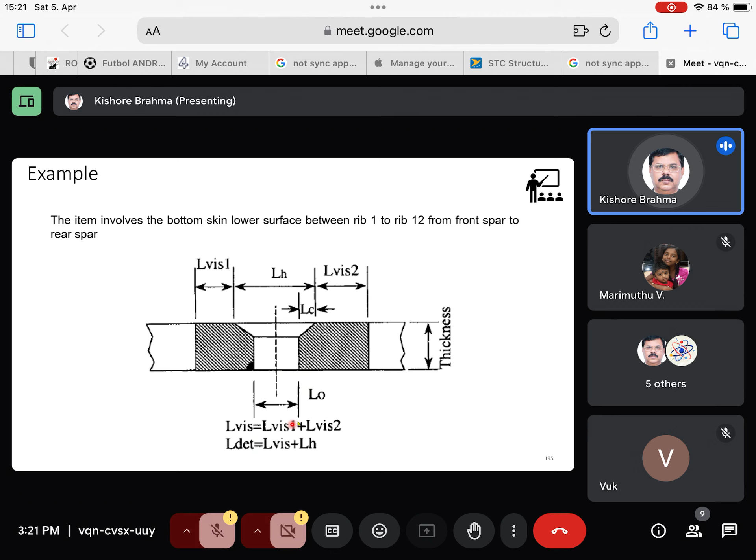So in that case, what should be the detectable crack length if using GVI? If not practicable, then you have to go to DVI, detailed visual inspection. So your visual consists of visual 1 and visual 2. If a crack is going only one side, one of them will be 0. If both sides are there, you have to add them. That will give the total visual. Then detectable is nothing but visual plus hidden.

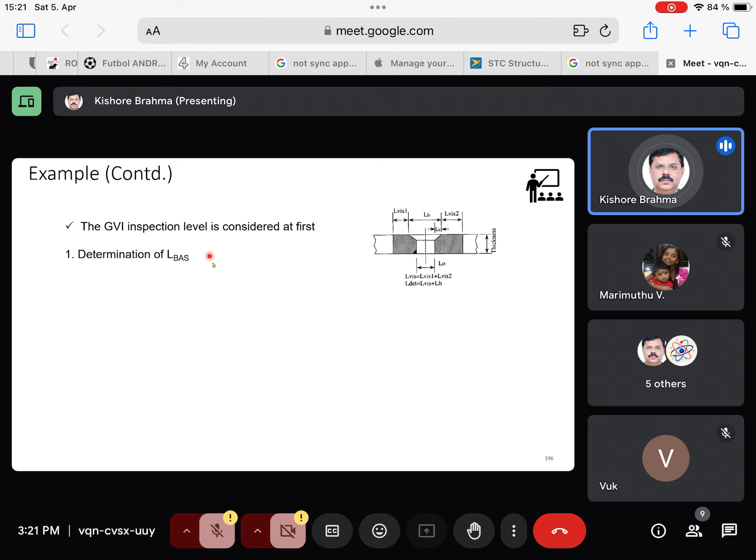So the GVI inspection level is first, as mentioned in the flow chart. They will attempt to use the simplest, most cost-effective, least downtime method, which is GVI. And to start with, we have to calculate the basic, right? It is based on this rating. So based on the conditions, your viewing rating is good. That means it is unrestricted, as close as needed. Viewing rating can be poor, moderate, and good. So you are in the category good.

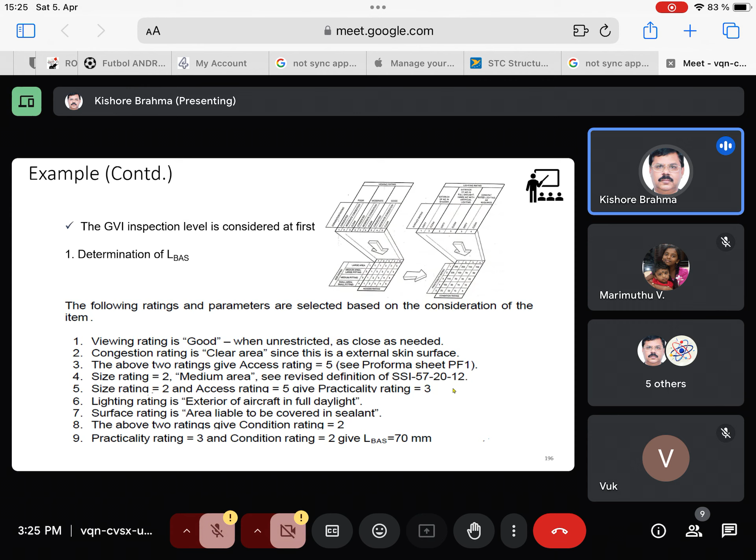So since the thickness is 10.3 mm and it is a non-edge crack, as per the assigned value, the gauge factor is taken as 1.5 and the edge factor 1. So you multiply: L visual will become L basic into gauge factor, multiplied by edge factor, which is nothing but 105 mm. Okay. So detectable will become 105 mm.

Now you have to see whether it's practicable to use for the next repeat inspection. Because if you detect only 105 and your critical crack length is, for example, 125, hardly there will be 20 mm left. Or even if you consider 200 mm, hardly there will be 95 mm. May not be practicable, depending on the type of structure and criticality.

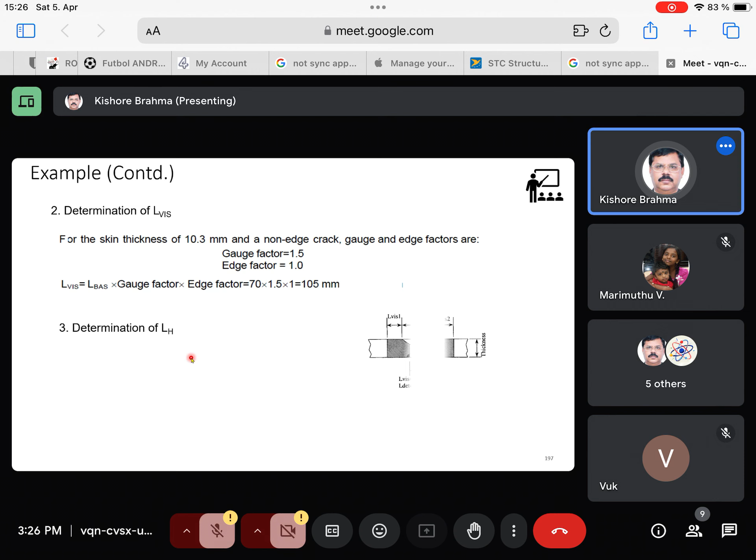Anyway, based on what we saw on the previous slide, the different conditions, using the process we found the visual basic. Then next is determination of hidden, because it is a countersunk. In that case, hidden is given by L0 plus LC. For the example, LC is given because you know the countersunk specification. For that type, it is 7.94, LC is 5.68, diameter is L0. So you add it up, and it becomes 13.62 mm.

Now your total detectable crack length will be L visual plus L hidden. So that works out to be 118.62. Sir, this detectable crack length is very long, no, sir? It's very large. Yeah, that's giving an example. But they will attempt to use GVI. In some cases it may be possible.

I was telling the example the other day. If the flap or the wing is pierced with a very sharp object, during the walk around inspection the technician has a short time, because the aircraft is landing before going to the next destination. So if that happens, the detectable crack length is 70 mm.

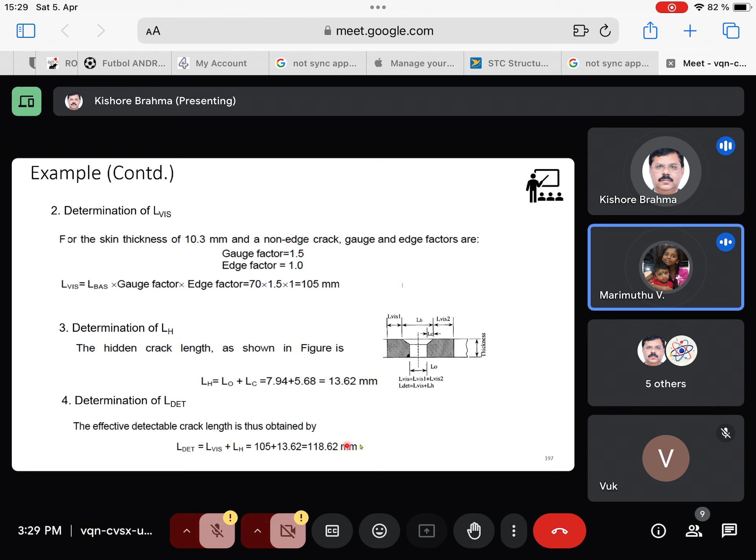Okay, sir. Understood. So this is the example where the crack of 118 is very large, right? Yes. So what it says, since this GVI doesn't give an adequate inspection interval, it's not practicable, I mean feasible. So they have to go to the next, DET.

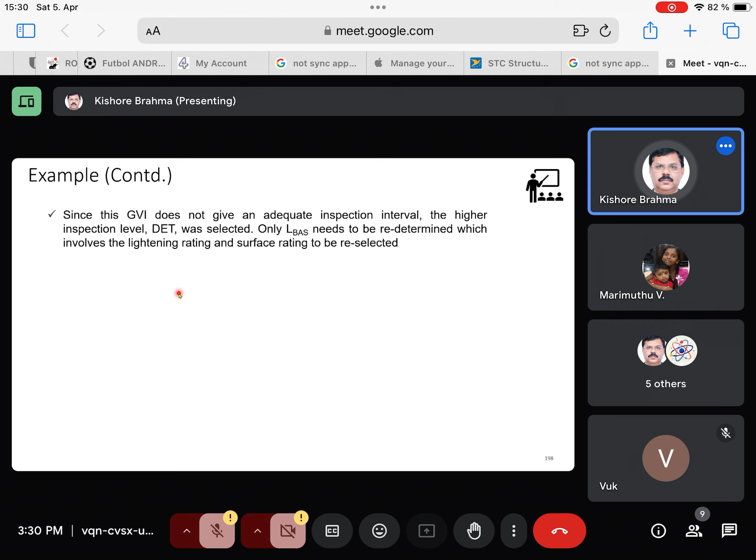Now L basic needs to be redetermined, which involves the lighting rating and surface rating to be reselected. Other things remain the same because the component remains the same. Only for DET, for sealant features, you need to use concentrated light and you have to remove the sealant. If you go to DET, the lighting rating becomes concentrated lighting as required, and the surface rating is clean area. Then the above two ratings now give condition rating 4 instead of 2.

Once you clean that and use concentrated lighting, there is improved clarity. So instead of 2 earlier, it becomes 4. Then practical rating becomes 3 and condition rating becomes 4, which gives 22 mm as the basic. Again, your gauge factor and edge factor remain the same, because it's the same 10.3 mm and non-edge crack. So you will now get 33. Now your detectable will become 46.

See, where it was 118, or 108? 118.62, right? Now it has become 46. Almost less than 50% of what one could detect using general visual inspection.

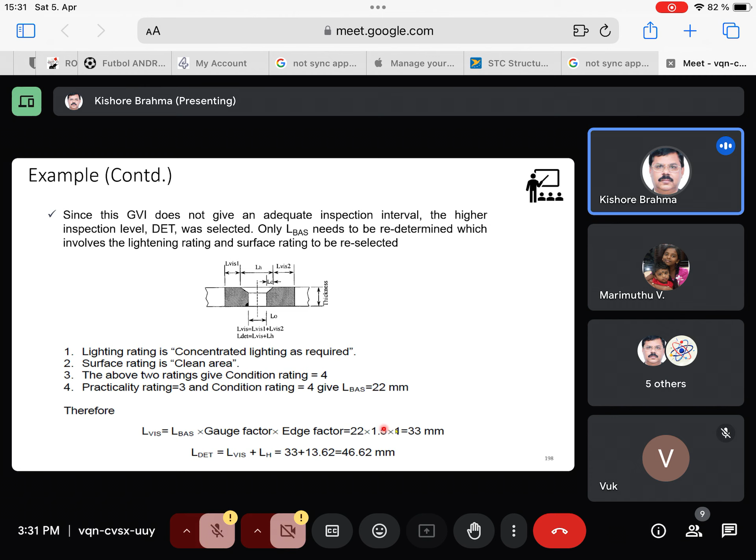Okay, this is not required. Then I will stop here. We'll take a break. Then we'll go to the overview of non-destructive testing. Okay, sir.